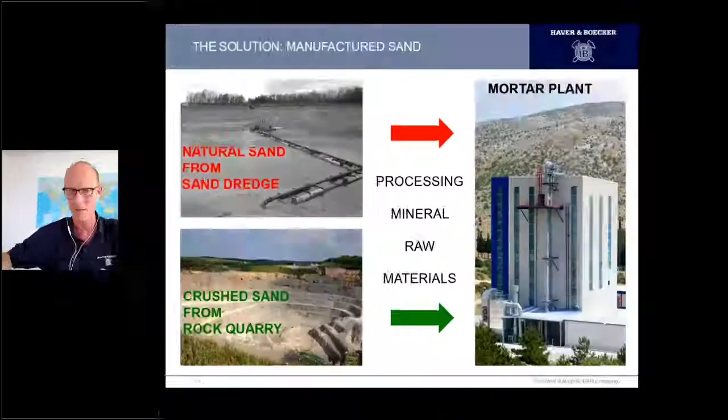One second, please. I just received some hints here on problems. Let me just have a look at what is going on here. All right. Okay, I just learned that I can see the slides on the screen, but not you. I'm just looking into my options. One second. So here we go. If anybody can give me a hint, if you now see clearly. Yeah. All right. So there was a problem reported that you cannot see the different slides. Is that better now? Yeah. All right.

I believe that the problem is clear to us now, and nevertheless we just want to go on now. What is the way for the rocks to become manufactured sand for our mortar applications? Let's have a look.

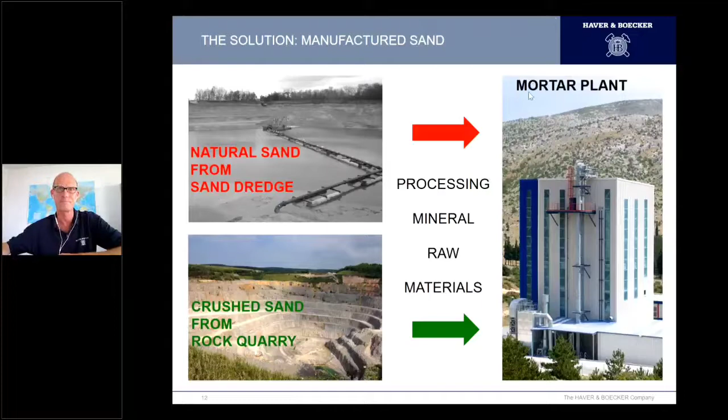So the main point is if we have blasted rocks, they appear in different sizes, maximum like 1 meter size, 1.5 meter size, even 2 meters. And then there's all kinds of particles smaller than this available when the rocks are blasted. But in the end, we need them in sizes far less than 2 millimeters.

They need to be comminuted. The size needs to be reduced, and a 1 meter rock cannot be reduced in size in one stage. We need different crushing stages. And we know that our crushers today have certain size reduction ratios, for example, factors like 3, 4, 5, up to 10, 12. This is the maximum.

That means rock of a meter size needs to be reduced in the first stage to like 200, 300 millimeters. 200, 300 millimeter rock needs to be reduced in size to maybe a fistful, like 50 millimeters. And then we go into the area of grinding, and we use hammer crushers, vertical shaft impactors, vertical roller mills to create the actual sands we are looking for.

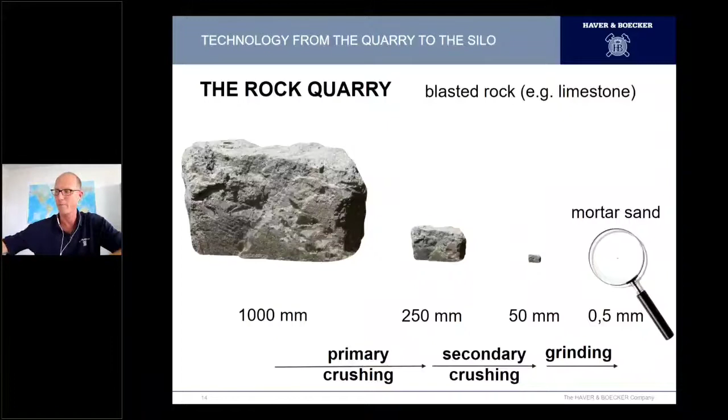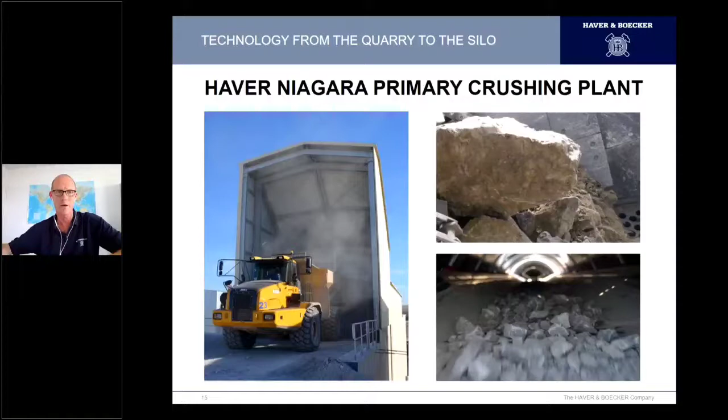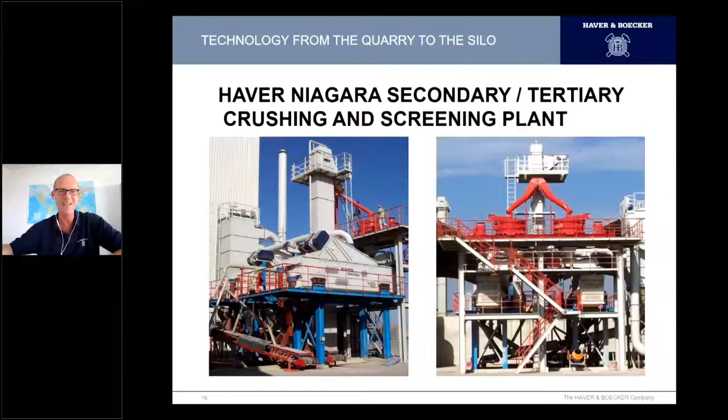Therefore, Haver Niagara provides the primary crushing plants to reduce the size in the first stage. Our screens are used in secondary and tertiary crushing plants. We also provide these complete plants. And due to our fine screening systems, we end up in front of the silos.

There's one specialty I want to give a hint on, and I have seen in our guest lists here that there's quite a community coming from manufacturers of vertical roller mills. Welcome again. You might know this principle here. There are today many cement plants that do not only the core business of producing cement anymore, but they became like cement plants of the future. They have a wide range of different products, and one of them is, of course, mortars, mixed cements. And therefore, we need these typical grain sizes that were mentioned already.

When we now look into the area of the limestone raw mill, and we imagine that we have a vertical roller mill there, there's for the past 20-25 years an established process where we can use the vertical roller mill not only to produce powder for the clinker kiln. It is also possible to extract grit from the head of the vertical roller mill, do a pre-classification by an air classifier, and then put it to a screening and fine screening system.

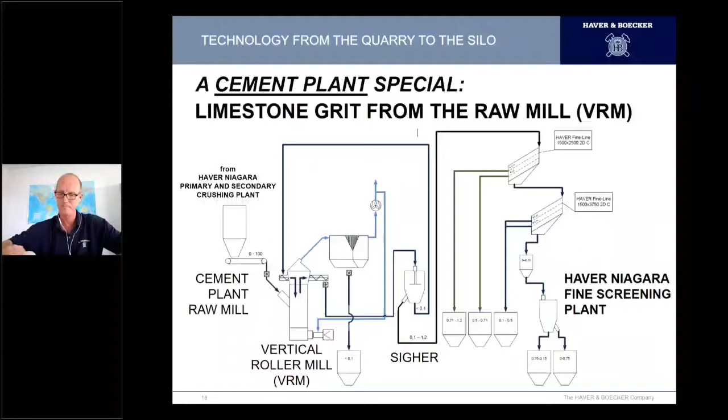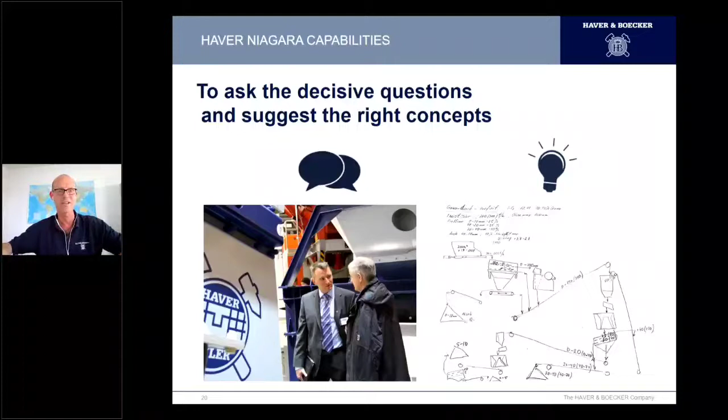What are our capabilities in this field? So, of course, we do not do the whole processes, but we have certain points where we would like to be of use. So at first, we claim that we listen carefully to what you need. And again, such a webinar cannot be a substitute for personal meetings. I'm really looking forward to meeting you again personally. But in the meantime, let's try this way here. And if we understand what you need and what you want, I believe there's enough experience to derive the first ideas on how to solve your problems.

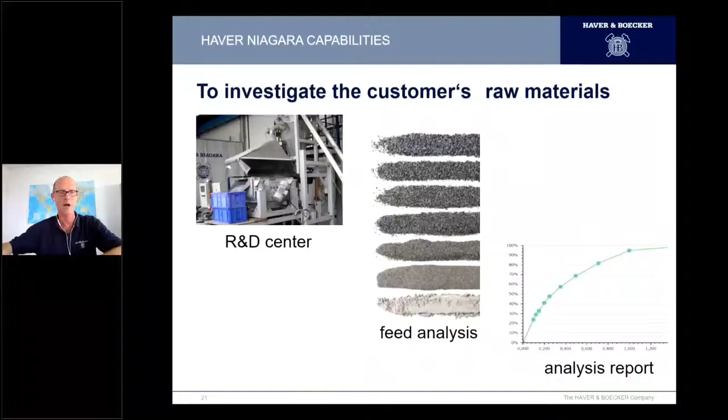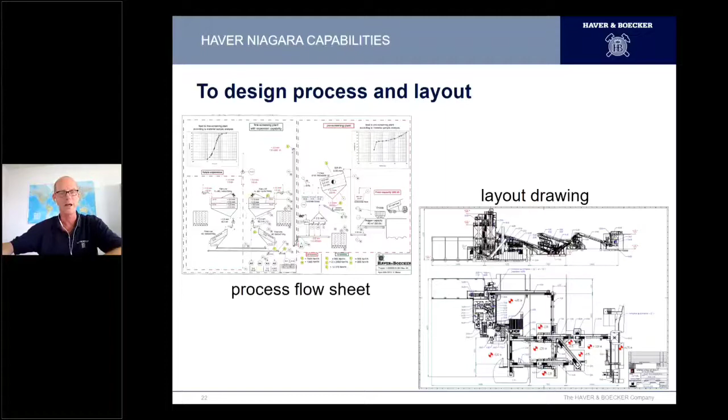If we go further on, we take your material to our test center, we do material analysis, and we do some small scale tests that we then take to our upscaling software to receive the right concepts. The concepts at first go into our process flow sheets, and later on we also look into layout drawings, how that could fit into your plants.

Of course, this is our main business, and we want to be recognized for this. We are manufacturers of screens and machinery. We have been building screens for about 80 years, at least here in Germany. Typical for the sand applications are our linear motion screens that you can see here on the pictures, for example, driven by our twin shaft drives.

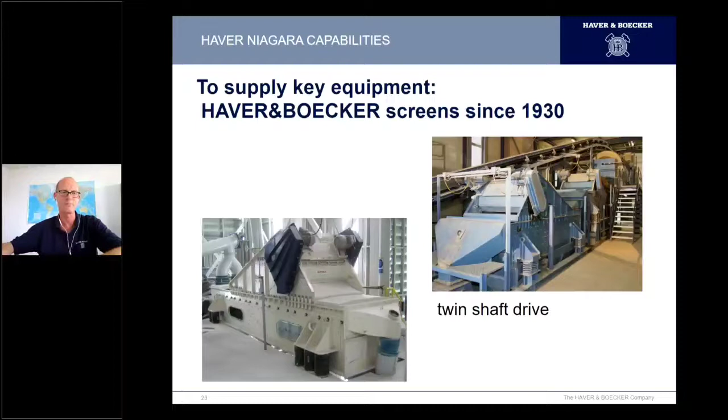And today the clean alternative to that is the Haver Exciter drive that is manufactured by our friends in Brazil. It is a Haver own product, and this is bringing the power to the machines to bring the right forces to the right places.

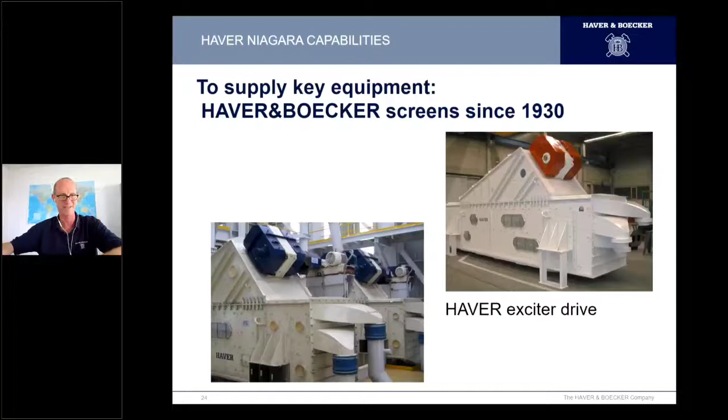Inside our machines, there is the core technology of the woven wires. It is, I think, important to repeat again that Haver Niagara is working with Haver and Boecker woven wires. Woven wire cloth is with Haver and Boecker since 1887. There's a huge experience in this field, and there are many of our competitors also using Haver and Boecker wire cloth meshes. But we will see later on in this webinar why it is so important to have some knowledge on wire cloth and the right screen media.

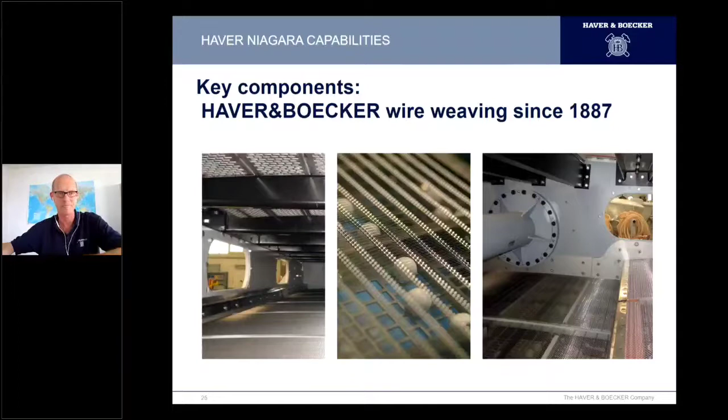So here we go. I believe for everybody it is clear that for making a quality sand fraction, we need to limit the upper limit of a fraction and the lower limit of a fraction. What is a limit? Let's say we talk about a sand from 700 micron to 1000 micron, 1 millimeter. And if we do that by screening, we limit both of these upper and lower limits by screening.

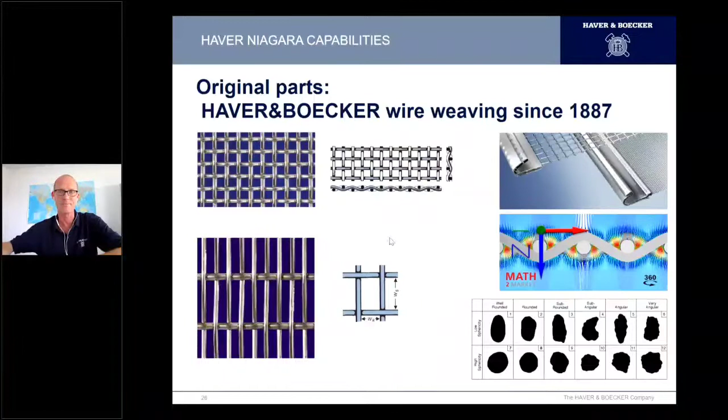In the end, it's of course important to have the right machinery parts and also the utilities here. I mentioned already that our drive gear is coming from our friends from Haver and Boecker Latinoamericana in Brazil. It's a technology also working in the mining industry for about 35 years, and this is what we also need here in our linear motion screens for the sand applications.

Last but not least, let's talk about grease, and this is a story that really improved the availability of our screens, lifetime and durability: development of our own grease. So what I want to summarize here is there's a lot of self-made technology inside our machines, bringing the complete systems together.

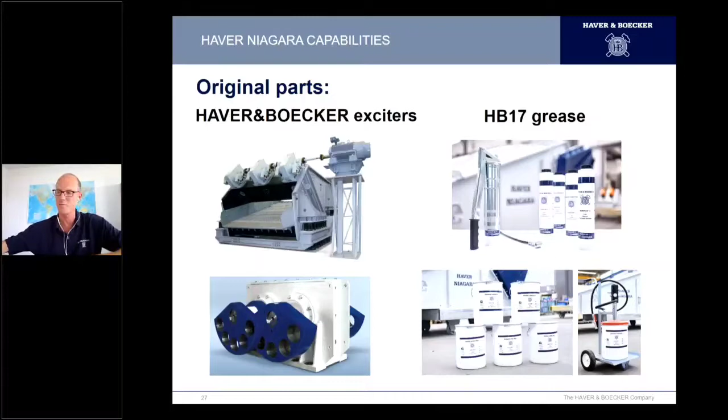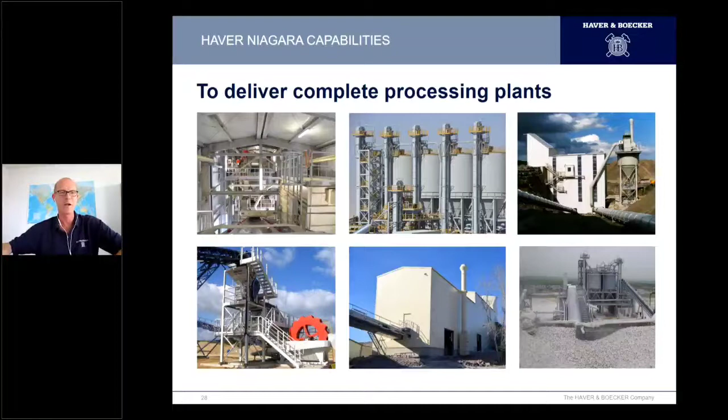Complete systems, yeah. Out of these core machines, out of these core technologies, we combine it together with our partners and make partial systems or complete systems out of that. So we include crushers, dryers, conveyor belts, silo systems, dosing systems and so on together with our partners. But in the end, we also want to be recognized as a partner delivering not only screening machines.

So coming to the point now, what is this theme about innovation in the field of quality and efficiency? What is that about? I need to go very shortly into the very basics of screening. So again, what is screening? What is this process? It is the frequent comparison of a particle size, the size of a particle and the size of a certain opening. So is it possible that the particle goes to the screen underflow, so it is smaller than the opening, or it is larger than the opening, so it will just go over this opening?

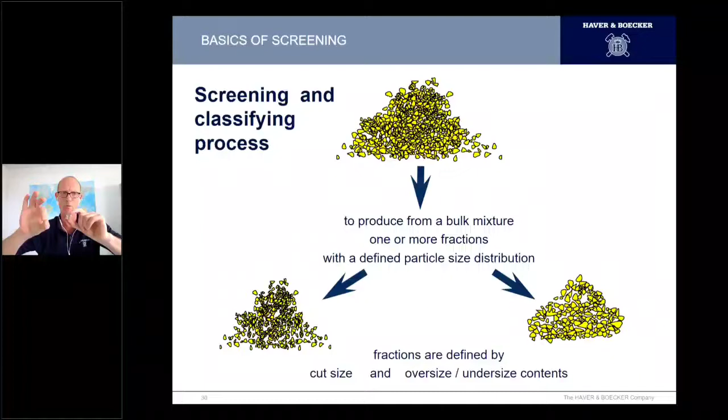Pretty much clear. So when you look to the slide, we want to create from a bulk mixture different fractions, meaning a fine fraction and a coarse fraction. Pretty clear. And when we talk about screening quality, we are looking at the different fractions we produced by screening. If we have a feed, which is a mixture of coarse material and fine material, we expect that by screening, the fine material will run to the screen underflow, whereas the coarse materials go to the screen overflow.

But everybody knows from practice that there will be fine ingredients in the screen overflow, undersize in the screen overflow, undesired but reality. And there will be oversize in the screen underflow, whether we want it or not. So why that?

Undersize in overflow appears if a small particle, which actually should run to the screen underflow, cannot make it on the screen area, cannot make it on the way from the screen intake to the overflow. So although it is small enough to be actually in the screen underflow, it does not make it there. Why? Maybe the screen is too short. It is too small, or we don't want to pay for a screen which is long enough or large enough, or our installation does not have enough size and geometry to include such an installation.

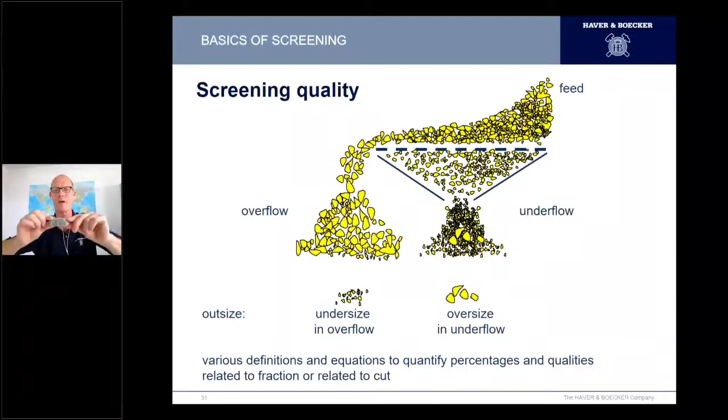And oversize in the screen underflow can happen if, remember this particle here, a nominal particle would not run to the screen underflow, but the shape of the particle allows it to drop into the screen underflow, although in other directions it would not go through.

So we need to accept technically and also commercially that there will be undersize in overflow and oversize in underflow off spec materials in our fractions. But this is not a catastrophe. Everybody lives with it. We just need to accept the limits set by our customers, set by our recipes in our mortar mixtures.

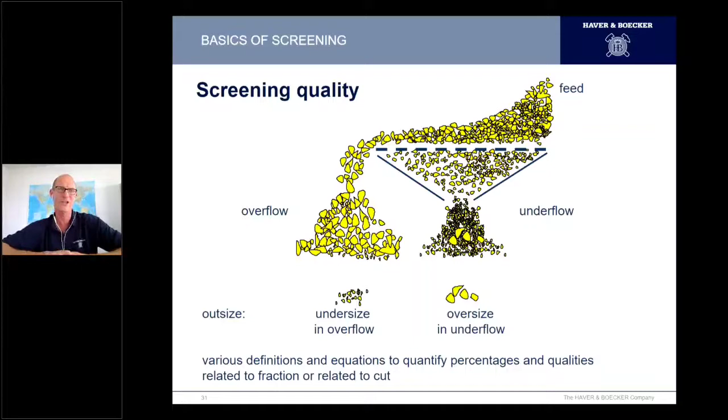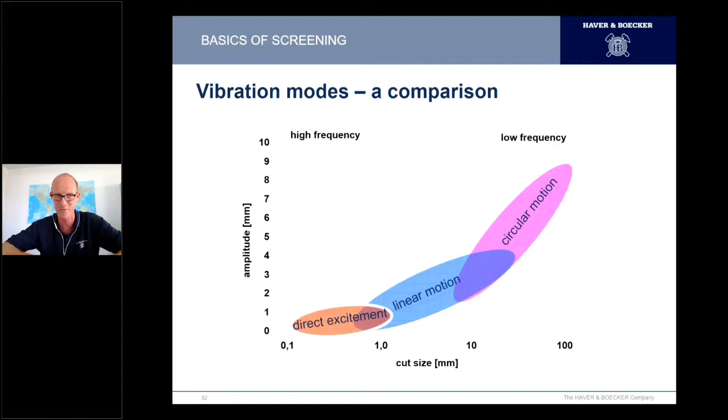With this literature, with this experience of decades, we go into a simulation software, whose name is NIAflow. It's an expert software developed by our colleagues here at Haver Niagara, an upscaling and sizing software for screening machines. And over the decades, it also became a simulation software for complete processes in mining and in crushing and screening circuits, where you can find bottlenecks and optimize systems.

And this is always used today when it's more than a screening machine, in closed circuit concepts where we need to find answers like, is the screen the bottleneck or is the crusher the bottleneck? How can I improve my return rates and, in the end, find the best economically feasible solutions?

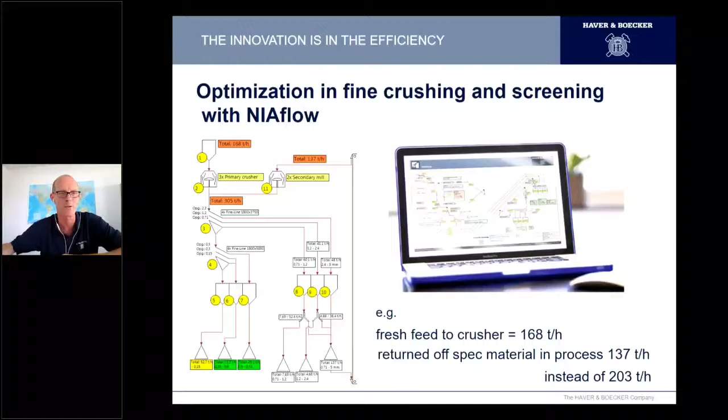Before I invite you to post some questions and comments, I want to make a quick summary, which is: today there is no sustainable alternative to manufacturing sand by crushing and screening, because we are intelligent, conscious and aware people, we like the environment, and therefore it is not possible to go on for the next years and decades grabbing natural sands from the rivers and the seas.

Whereas the crushers and the mills do the size reduction work and the particle shaping work, it is the screens that do the quality-decisive finishing. And Haver Niagara is expert in all the surroundings of these screens and the screens themselves, and we would be happy to be your partner in this field.